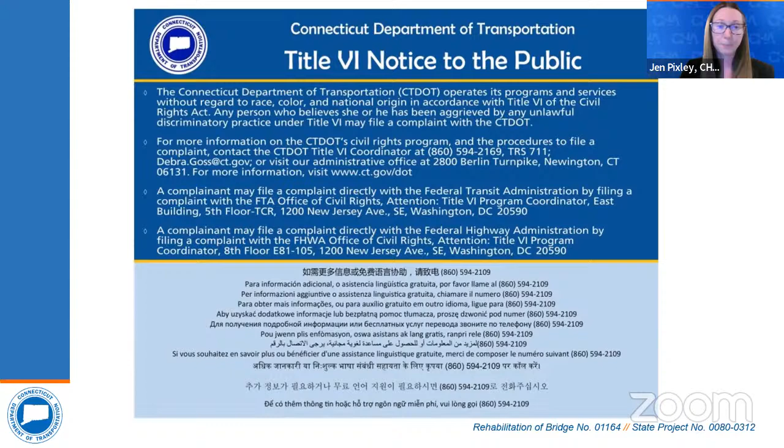As part of Title VI civil rights, no person shall, on the basis of race, color, or national origin, be excluded from participation or subject to discrimination in the development of this project. A link is provided on this slide for additional civil rights information.

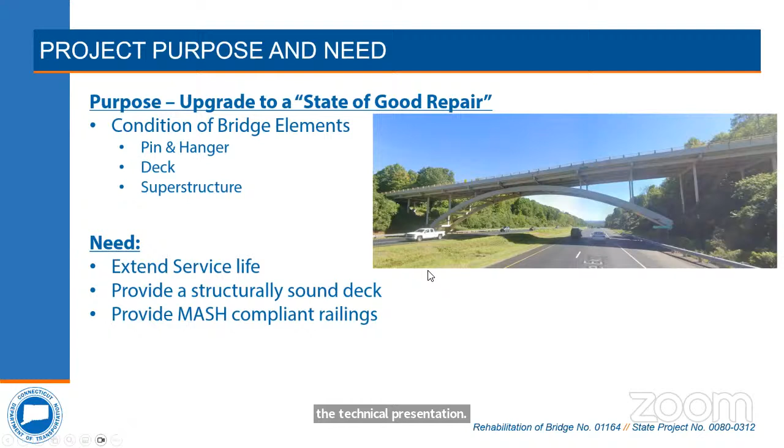Thank you, Jen. As Jen was saying, my name's Brian Kinsley, I'm with Hardesty & Hanover. We've been working on this project the last several months to put together something we think is a good, feasible option.

The purpose of this project has been to upgrade this bridge to a state of good repair, focusing on the pin and hangers, the deck, and the bridge superstructure. The goal is to extend the service life of the structure, provide a structurally sound deck, and provide MASH compliant railings, MASH being a new term meaning crash compliant.

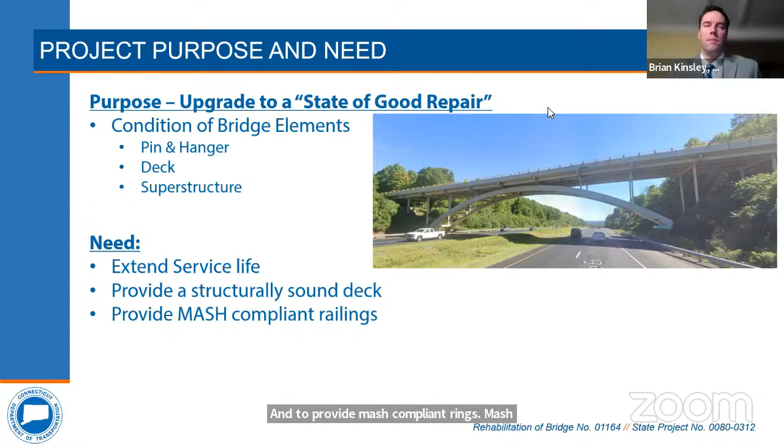Here's the aerial view of the project structure. It carries 2 lanes of local traffic over 5 lanes of I-84. The bridge was originally constructed in 1964, with no major rehabilitations since. The structure has a total length of 381 feet from abutment to abutment, and the initial project purpose was to evaluate and replace the non-redundant pin and hanger system.

Based on the condition and rating of the existing deck, the scope was expanded to include a complete deck replacement. The deck is original, but it's covered in maintenance repairs on both the top and underside, including some full depth repairs.

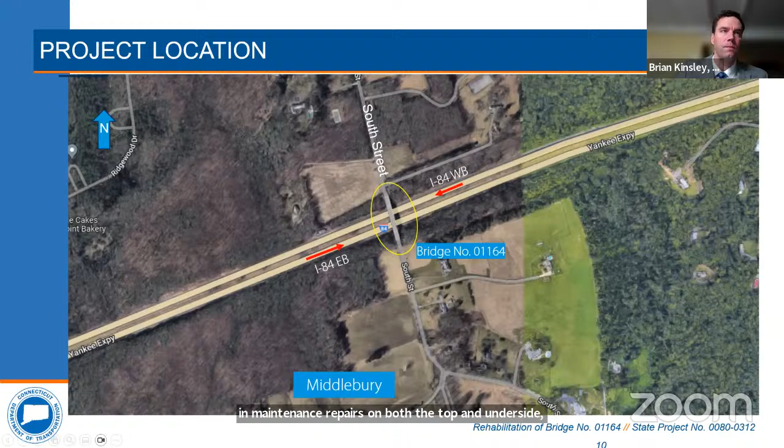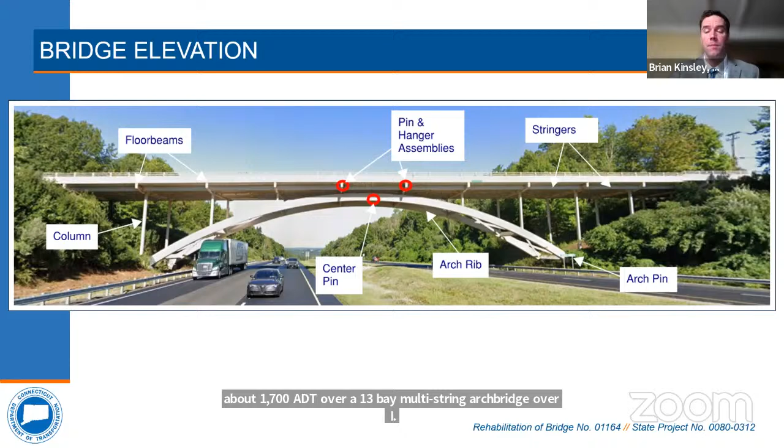Here's an elevation of the project bridge. It carries about 1,700 ADT over a 13-bay multi-stringer arch bridge over I-84, 2 lanes eastbound and 3 westbound. The current deck is 7¼ inch reinforced concrete, and there is a 29-foot long pin and hanger supported assembly at mid-span.

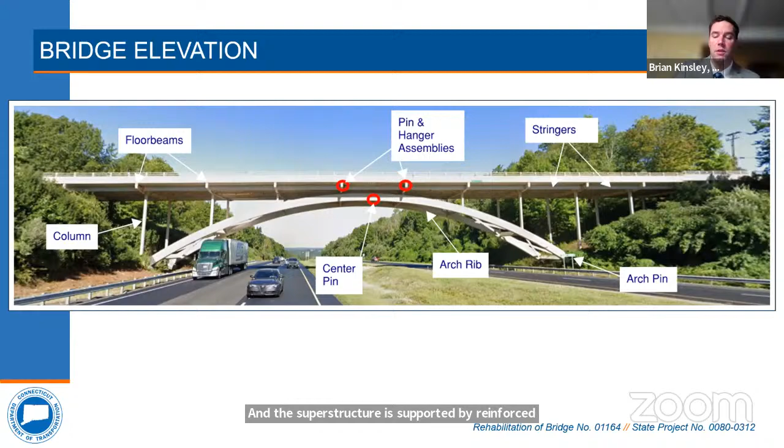The 2-rib arch structure is 193 feet long from center of pin to the center of the other 8-inch diameter arch pin at the other end, with a 4-inch hinge pin at the mid-span that has been enclosed by welded steel plates. The superstructure is supported by reinforced concrete abutments and steel columns that transmit the load to the arches or to independent footings.

I'm now going to dig into the existing conditions of the bridge. You've heard me use the term pin and hanger. The initial purpose of this rehab was to address the pin and hanger system on the bridge. These assemblies were used to reduce analysis and design complexity while simplifying construction and providing bridge expansion joints.

A pair of large steel pins go through these plates and the girder webbing to provide hinges, holding up the suspended span while allowing it to move longitudinally. Large washers are bolted to each end of the pin to retain the hangers. The pin and hangers on this bridge are in good condition and still in service, but will be replaced using higher strength and more corrosion-resistant materials. A new supplemental sling system will be installed at each pin and hanger to develop redundancy for these fracture-critical details.

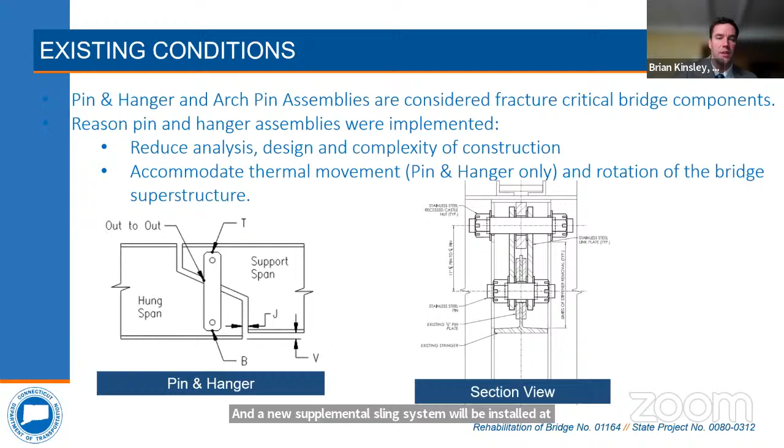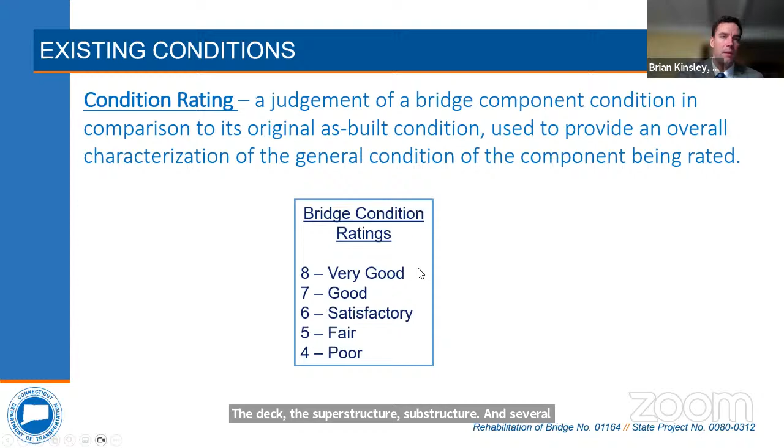The condition rating on the bridge is generally a judgment of the component condition compared to its original or as-built condition. We use these numbers to provide an overall characterization of the general condition of the components being rated. On structures like this, we rate all the major components: the deck, superstructure, substructure, and several others, generally on a scale of 4 to 8, 8 being in next to new condition.

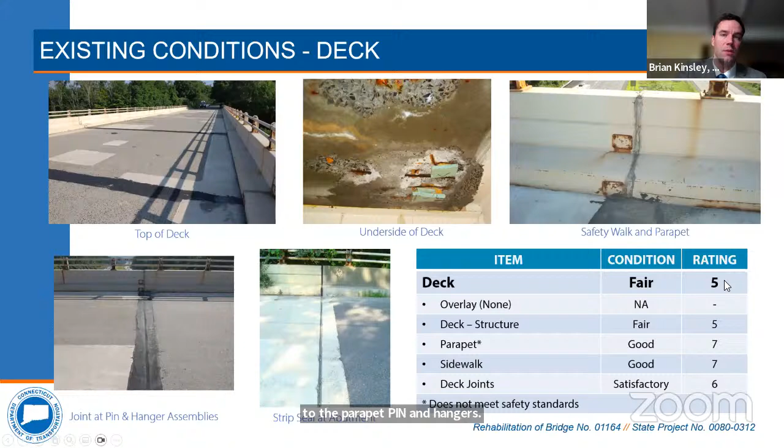The bridge deck, as seen from above, exhibits several patches over the last several decades. On the underside of the deck there's spalling and some exposed rebar, with minor rusting. Inspection access to the parapet pin and hangers is very limited because of how this bridge was constructed. The bridge deck rating is currently fair, at a 5.

The existing approaches have substandard guide rails. There is a drainage swale on the south end of the bridge that carries stormwater below the road at 2 catch basins. There are adjacent residential properties and driveways, and only the driveway to the north will be affected during construction. Access will be maintained to all properties during construction.

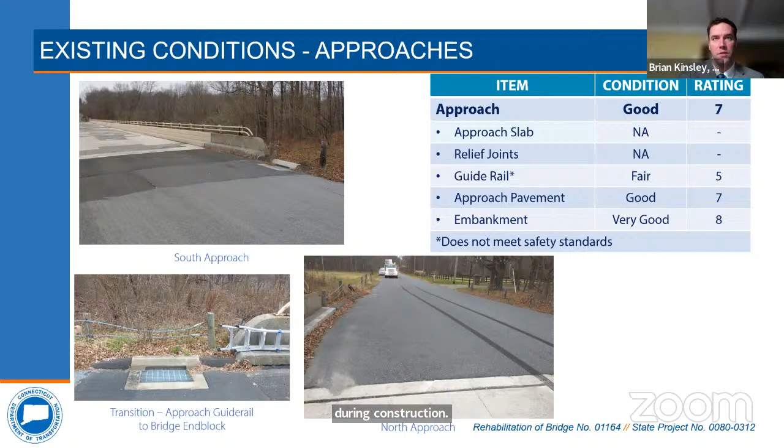The existing arch span is shown. The paint on the bridge is in reasonable condition, and the welded joints on the arches and floor beams limit corrosion and hot spots, keeping the bridge looking pretty clean. There are minor coating losses at the fascias and parapet supports, as water tends to condense and trickle down these locations without a drip edge.

Water flows down the arches toward the existing bearings, which have been sealed in recent years to reduce any additional corrosion. As we can see, the superstructure currently sits at a 5.

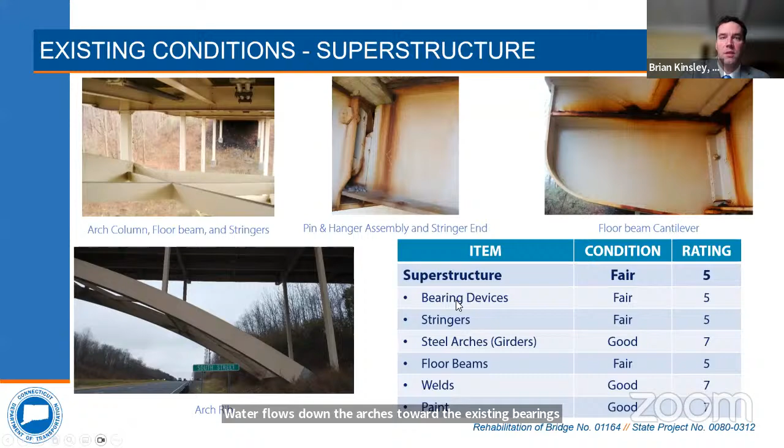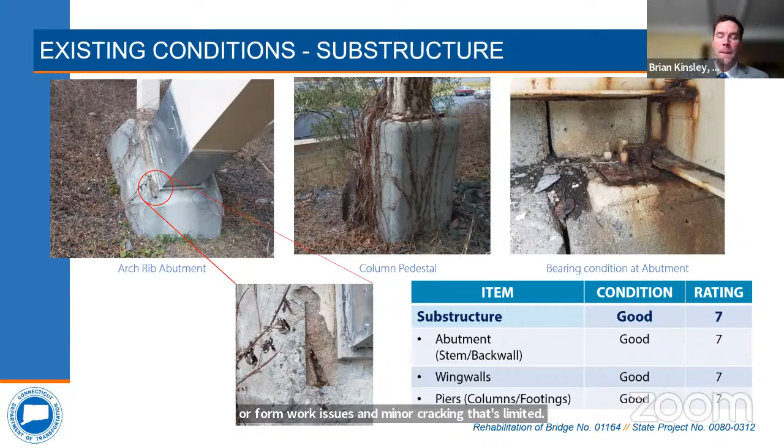Here's the bridge substructure. Note the enclosure at the arch rib bearings. There are 8-inch diameter arch bearing pins that are kept dry on the inside, even on rainy days, due to the enclosures incorporated several years ago. There's minor spalling at this substructure due to original formwork issues, and minor cracking limited to a few locations at the abutments. There are also some exterior bearing anchors that show the worst losses, as they are the most exposed.

These will all be replaced as part of the rehab.

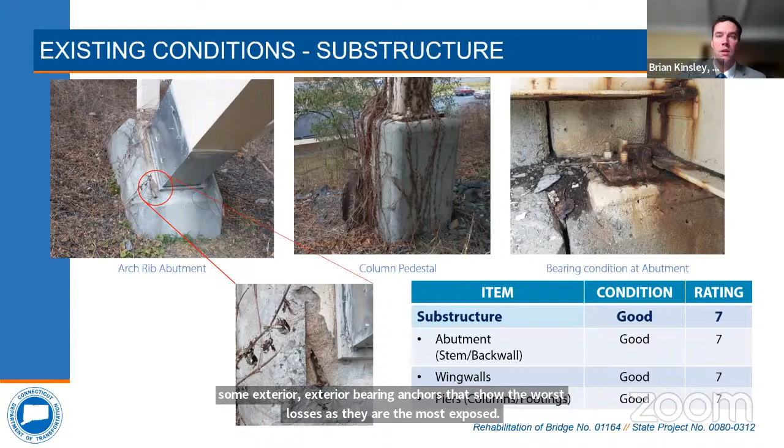The existing structure carries a total of 4 phone and electrical conduit lines that run the length of the structure. At least one of the conduits is empty, and 2 of the other conduits exhibit full loss due to corrosion, with the lines inside being the only thing holding up these conduits. These will all be replaced during construction.

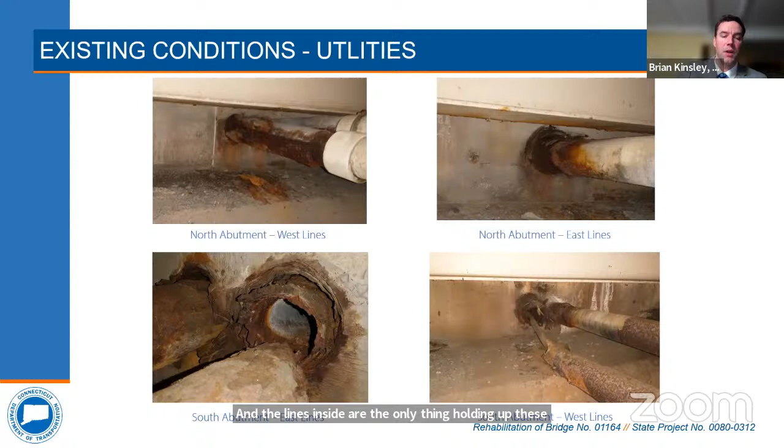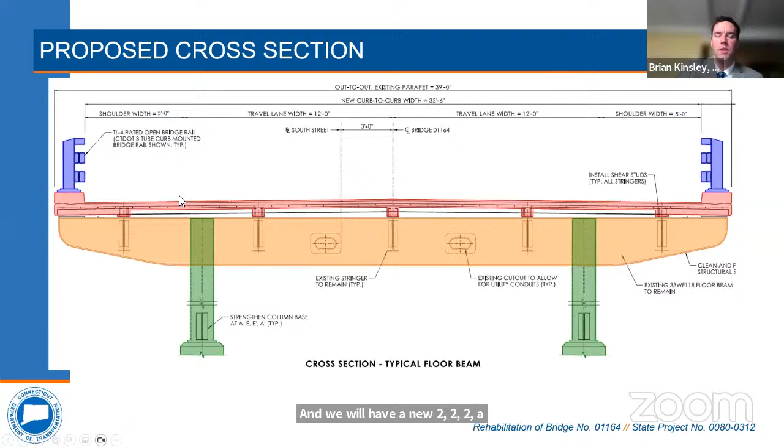The summary of the work includes replacement of the deck with lightweight concrete, installation of new crash-tested bridge railings and end blocks, regrading the approach roadways, replacing the existing wooden post barrier, and replacing the affected driveway. Beneath the deck, we plan to replace the pin and hanger assemblies and install redundant support systems below these pin and hangers. There will also be limited steel strengthening and repair, and we will include bearing replacement. On top of that, the bridge is to be cleaned and painted.

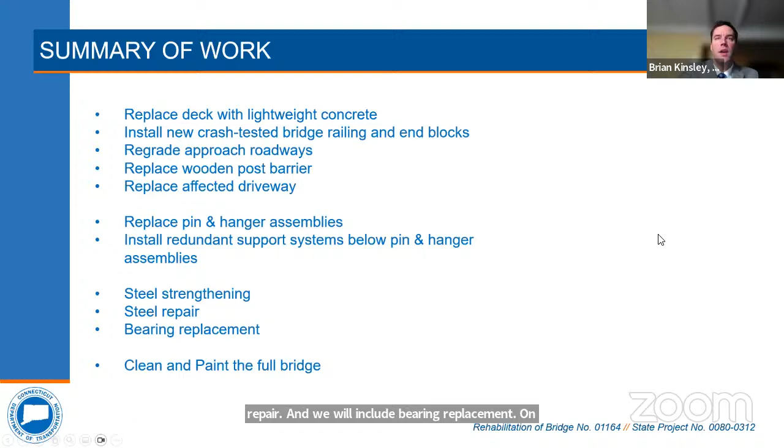The maintenance and protection of traffic will be accomplished as follows. During the first stage, we will place temporary barrier walls along the I-84 median shoulders and utilize short-term lane closures at nighttime and in the morning as we keep working on the bridge. At least one lane along I-84 in both directions will remain open at all times. This will allow us to complete the work at the pin and hanger span at the center of the bridge.

During the second set of stages, we'll relocate the temporary barrier walls to the I-84 outside shoulders to finalize the bridge work. In regards to traffic along the bridge, the South Street Bridge will remain closed throughout the duration of the project to allow for construction.

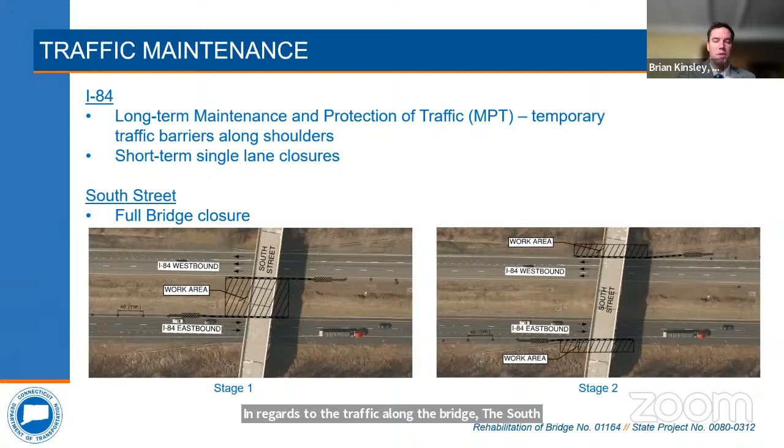While the bridge is closed, a detour route will be in place, utilizing Long Meadow Road to take traffic around the work area. Appropriate detour signs will be installed to guide drivers along the alternative road. The extra number of vehicles expected to use Long Meadow Road is not anticipated to have a great impact on the local traffic.

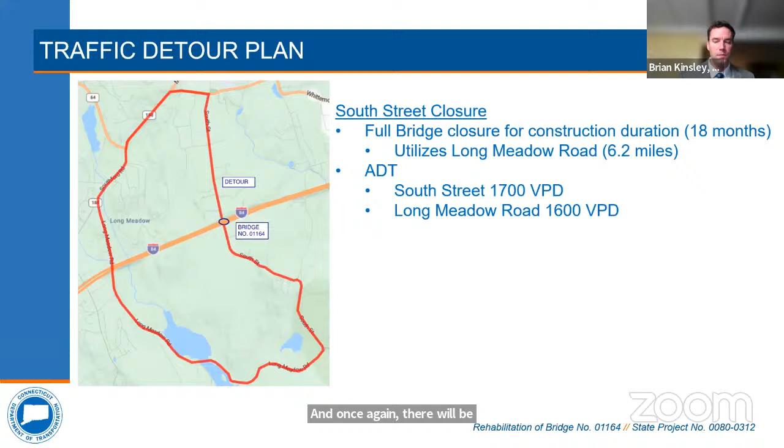Once again, there will be access to all properties at all times during construction, and there will be coordination with all emergency services throughout construction.

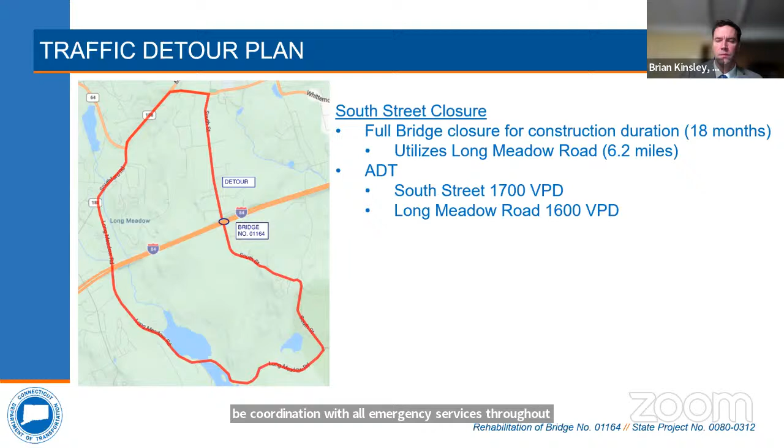And on that, I'm going to hand it back to Jen to discuss the project schedule and cost.

Thanks, Brian. So on this slide, I'll present the preliminary project schedule and cost, which are subject to change as design progresses. For the schedule, we are currently in preliminary design phase and will be moving to final design in the spring. We anticipate that construction will begin in spring of 2026. The anticipated construction cost is about $14.8 million, and the project will be funded with both federal and state funds.

Okay, looks like we do have one question here. So when will construction begin? I should be able to handle that one.

We noted on the previous slide that the start of construction would be in the spring of 2026, but there are some materials for the project that have a long lead time. The stainless steel pins, for example, may take up to a year to order and fabricate. So while the project is going to be awarded in early 2026, construction will not likely begin, and the detour will not likely begin until the spring of 2027.

All right, great, thank you.